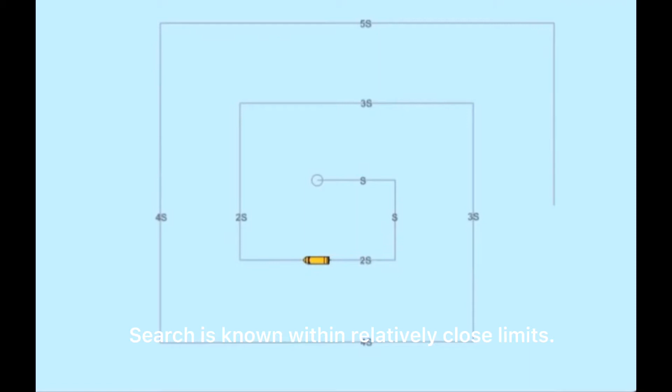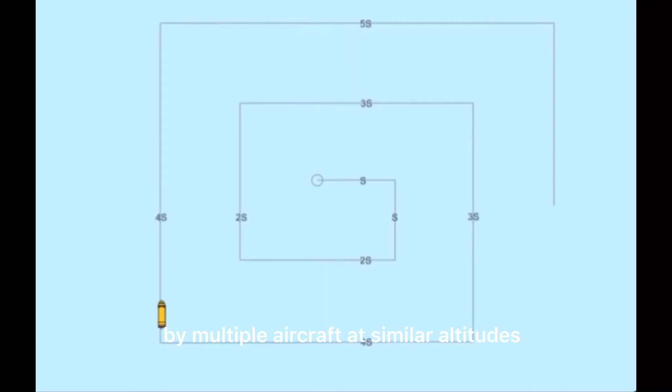The following are the different types of IAMSAR search patterns. First is the expanding square search. It is most effective when the location of the search object is known within relatively close limits. The commence search point is always the datum position, often appropriate for vessels or small boats to use when searching for persons in the water or other search objects with little or no leeway. Due to the small area involved, this procedure must not be used simultaneously by multiple aircraft at similar altitudes or by multiple vessels. Accurate navigation is required. The first leg is usually oriented directly into the wind to minimize navigational errors. It is difficult for fixed-wing aircraft to fly legs too close to the datum if S is less than 2 nautical miles.

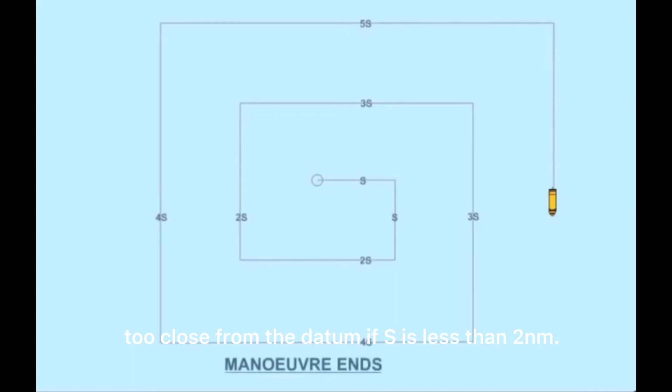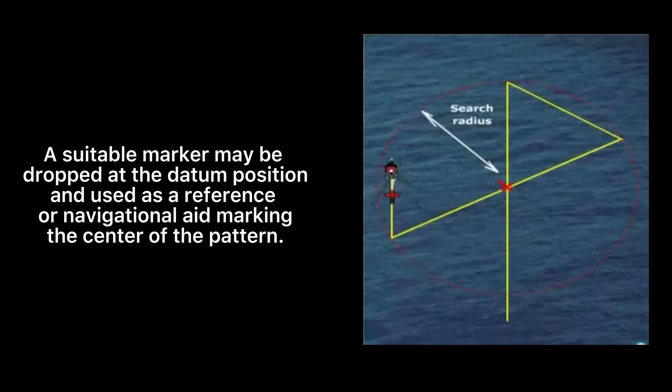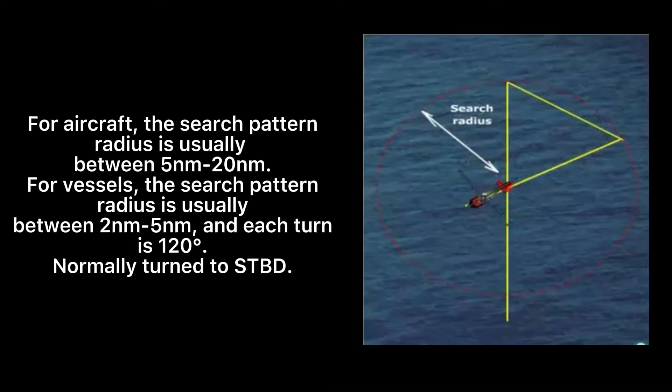Second is the sector search. This is used to search a circular area centered on the datum point. Due to the small area involved, this procedure must not be used simultaneously by multiple aircraft at similar altitudes or by multiple vessels. An aircraft and a vessel may be used together to perform independent sector searches of the same area. A suitable marker may be dropped at the datum position and used as a reference or navigational aid marking the center of the pattern. For aircraft, the search pattern radius is usually between 5 nautical miles and 20 nautical miles. For vessels, the search pattern radius is usually between 2 nautical miles and 5 nautical miles, and each turn is 120 degrees, normally turned to starboard.

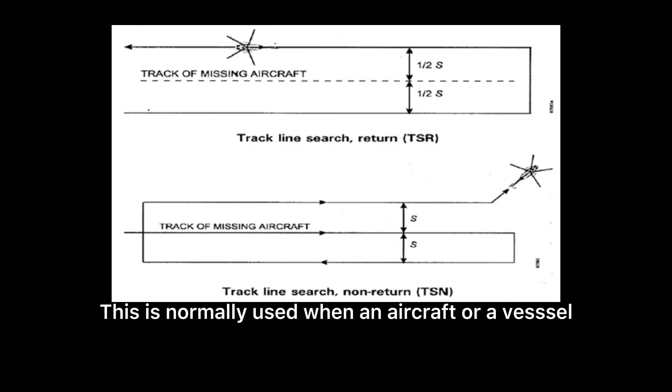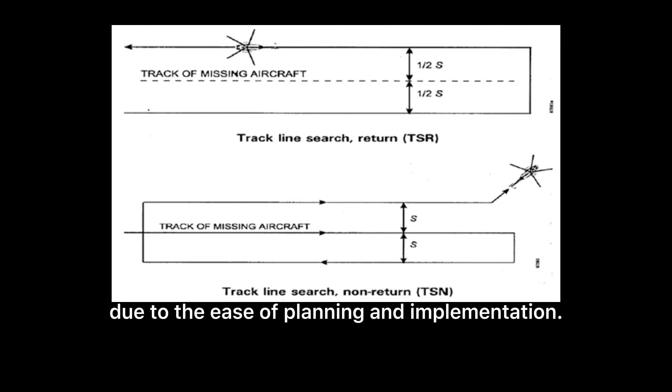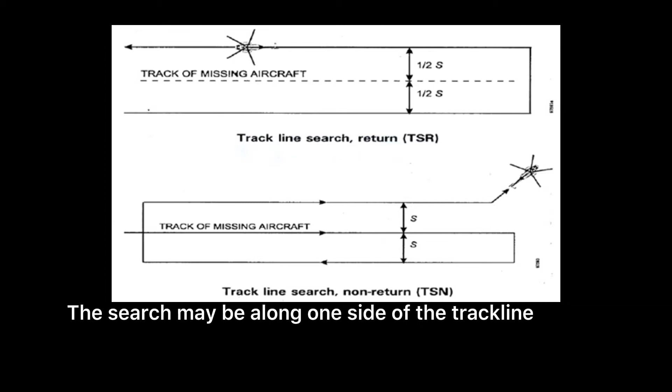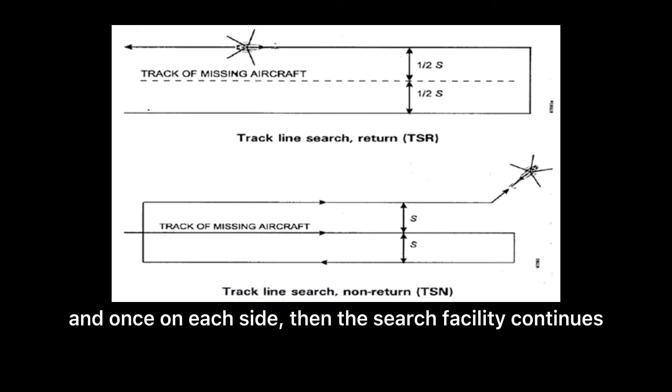Third is the track line search. This is normally used when an aircraft or a vessel has disappeared without a trace along a known route. This is often used as an initial search effort due to the ease of planning and implementation. It consists of a rapid and reasonably thorough search along the intended route of the distressed craft. The search may be along one side of a track line and return in the opposite direction on the other side. The search may be along the intended track and once on each side. Then the search facility continues on its way and does not return.

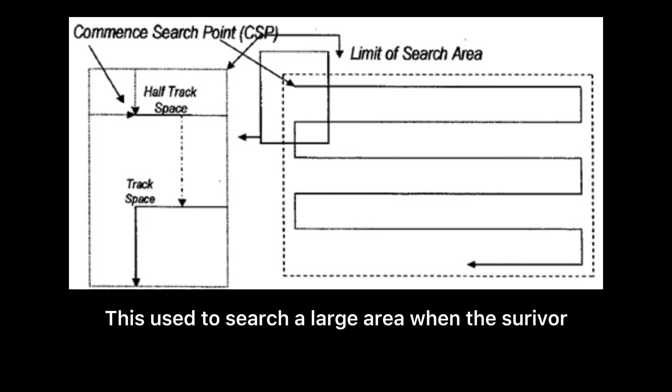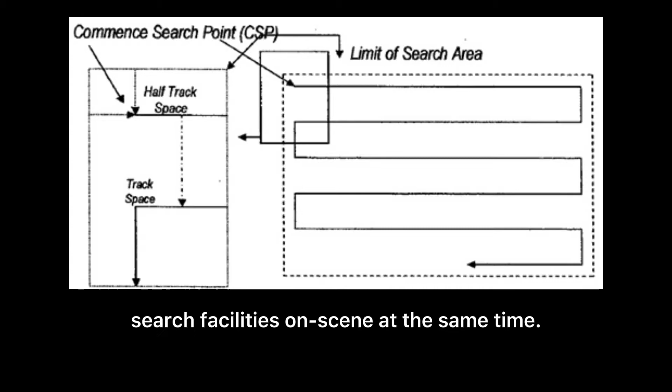Fourth is the parallel track search. This is used to search a large area when a survivor's location is uncertain. This is most effective over water or flat terrain. This is also usually used when a large search area must be divided into sub-areas for assignment to individual search facilities on scene at the same time. The commence search point is one corner of the sub-area, one half track space inside the rectangle from each of the two sides forming the corner. Search legs are parallel to each other and to the long sides of the sub-area.

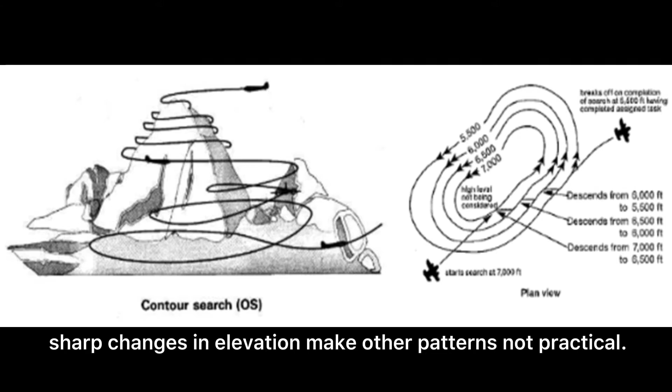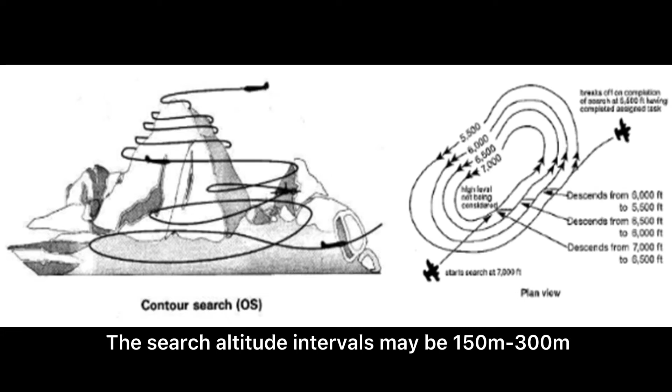Fifth is the contour search. This is used around mountains and in valleys when sharp changes in elevation make other patterns not practical. The search is started from the highest peak and goes from the top to bottom with a new search altitude for each circuit. The search altitude intervals may be 150 meters to 300 meters.

The aircraft may make a descending orbit away from the mountain before resuming the contour search at the lower altitude. The aircraft may spiral downwards around the mountain at a low but approximately constant rate of descent when there is not enough room to make a circuit, opposite to the direction of the search.

If the mountain cannot be circled, successive sweeps at the same altitude intervals as listed above should be flown along its side. Valleys are searched in circles, moving the center of the circuit one track spacing after each completed circuit.

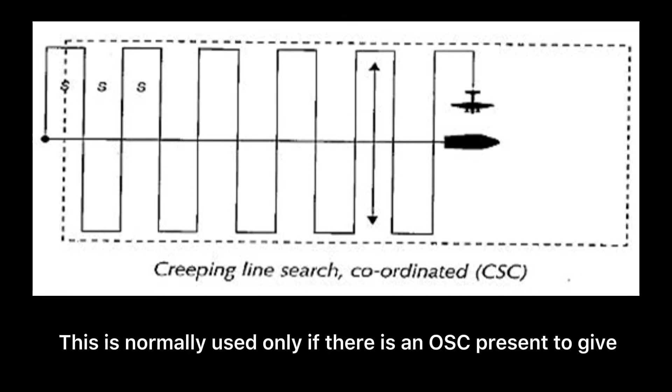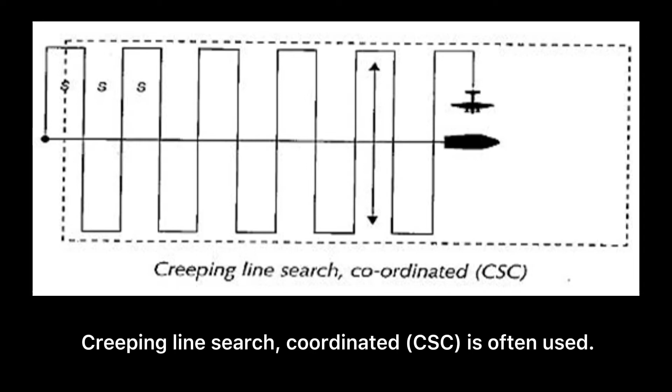Sixth is the coordinated vessel aircraft search pattern. This is normally used only if there is an on-scene coordinator present to give direction to and provide communications with the participating craft. Creeping line search coordinated is often used. The aircraft does most of the searching while the ship steams along a course at a speed as directed by the on-scene coordinator so that the aircraft can use it as a navigational checkpoint.

The aircraft, as it passes over the ship, can easily make corrections to stay on track of its search pattern. It gives a higher probability of detection than can normally be attained by an aircraft search alone. That concludes the search patterns that are used in the IAMSAR. I will be demonstrating next the different types of maneuvers.

There are a lot of risks when you go on a voyage at sea. There are a lot of accidents during the voyage of the vessel, and one of those is a man falling overboard into the sea. Unfortunately, of all the man overboard incidents that are reported, there is a high percentage of death results. Here are some reasons why seafarers go overboard in the sea.

Number 1, losing footing on deck or being swept by waves overboard. Number 2, being dragged by mooring ropes. Number 3, falling from the accommodation or falling from the ladder. Number 4, climbing or sitting on the ship's railing. Number 5, being drunk or under the influence of drugs. Number 6, working in poor visibility or working in rough sea conditions.

These are the reasons why ship personnel should act immediately to perform the proper way of recovering a man that has fallen overboard the ship. The following are the commonly used maneuvers for recovering a man overboard at sea. First is the Williamson turn. This is the most commonly used maneuver on board ships in the event of a person overboard.

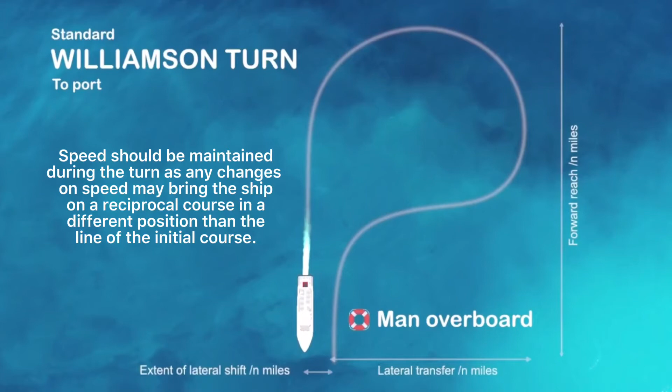Williamson turn is the ideal method in reduced visibility. If executed properly, it positions the ship on a reciprocal course on its exact original track, thereby allowing the search to commence on the track the victim fell over, not from the parallel track. Speed should be maintained during the turn, as any changes in speed may bring the ship on a reciprocal course in a different position than the line of the initial course. However, this turn takes the ship further away from the scene of incident.

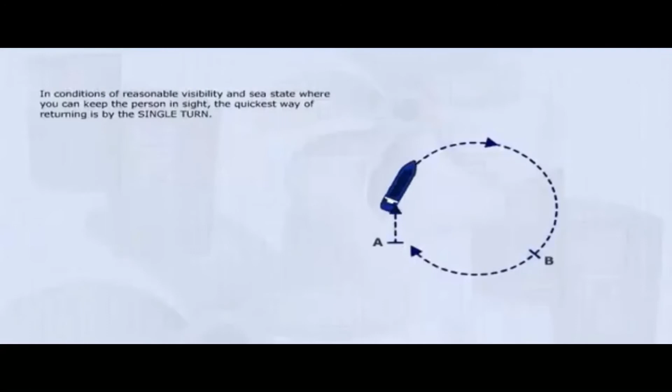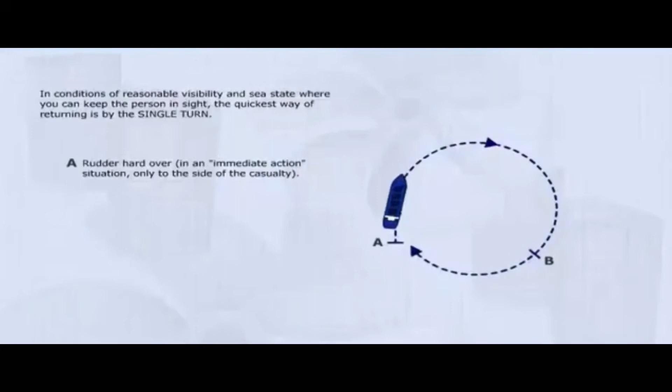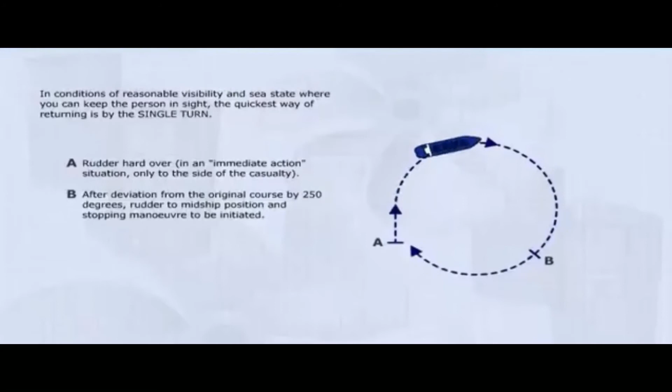Anderson turn or single turn. This is the fastest recovery method. It is the most appropriate turn for a ship in clear visibility. In case of this turn, the rudder is put hard over to the side of the casualty. After deviation from the original course by 250 degrees, the rudder is put to midship position. Revolutions need to be modified at the end of the turn and a stopping maneuver is initiated.

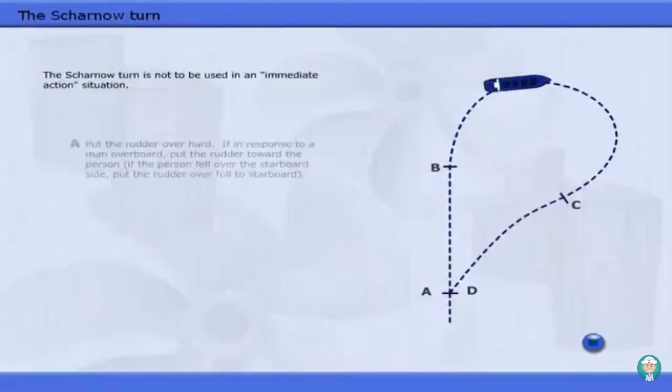The third one is the Scharnow turn. The Scharnow turn takes the ship back into her wake. However, it cannot be used in an immediate maneuver. This turn cannot be carried out effectively unless the time elapsed between the person falling overboard and the commencement of the maneuver is known. First, the rudder is put hard over to the side of the casualty to swing the stern away from the man.

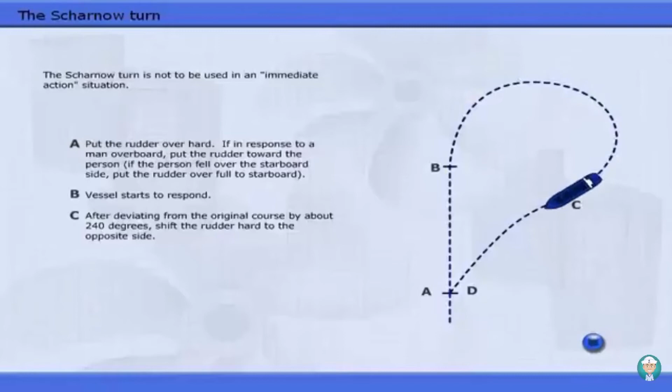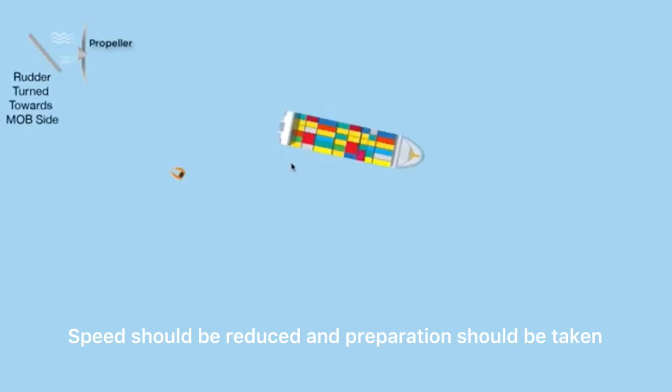After deviation from the original course by 240 degrees, the rudder is put hard over to the opposite side. When heading 20 degrees short of the reciprocal course, the wheel is brought to midship position. Once the ship is brought to reciprocal course, speed should be reduced and preparations should be taken to launch the rescue boat. The emergency boat's crew should stand by and be ready to launch the rescue boat.

It might not be possible to launch the rescue boat during worse sea conditions. In such case, alternative recovery methods, including the following, can be adopted. First, passing lines to the casualty so that they can be pulled alongside the ship. Rescue throw lines and heaving lines may be used.

Buoyant appliances such as life buoys or an inflated life raft may be deployed on secure lines and then pulled back to the ship. If none of these options is feasible, the ship must stand by until a helicopter or rescue vessel arrives.

Now I'm going to give you a scenario on transmission of distress alert, sending the distress alert by satellite, and the search and rescue of a man overboard, and also how to respond to the circumstances. It was a windy afternoon when container vessel Condoriano experienced an engine failure. The waves are getting bigger and it's becoming dark.

The deck cadet was on his way to the engine room to assist the other crew members when he suddenly slipped on the deck due to the rolling of the ship and the big waves. Another crew member sighted the incident and immediately reported to the master that there is a man overboard. The master acted quickly and constructed a distress alert to inform the nearby vessels and coastal stations.

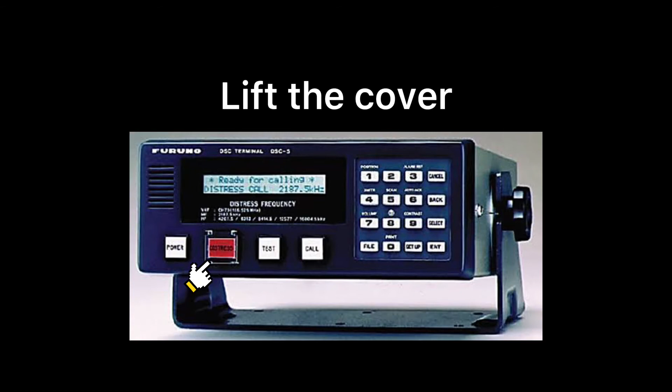First, locate the distress button, lift the cover, press and hold the button until it beeps, select the nature of distress, then press send. After sending the distress alert, the master proceeds to broadcasting the distress call by radio telephony using 2182 kHz frequency.